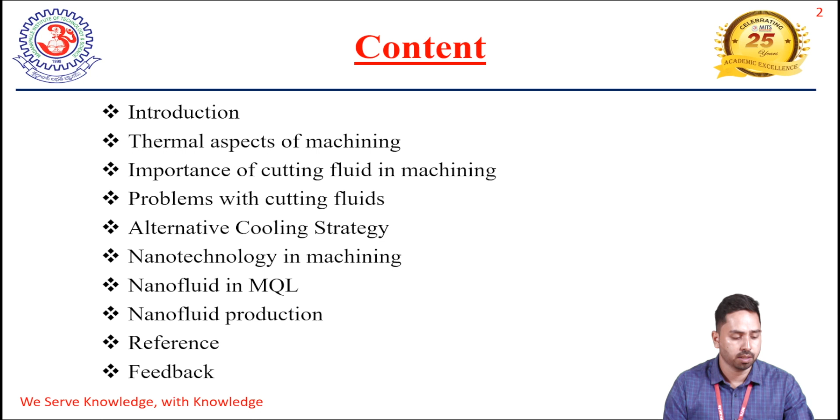In this first lecture, I'll be delivering the following topics: thermal aspect of machining, importance of cutting fluid, problems with various cutting fluids, different alternative cooling strategies, nanotechnology in machining, use of nanofluid in MQL processes, and nanofluid production, which will be confined in the next slide.

Manufacturing is one of the value addition processes by which raw materials of low utility and value, due to inadequate material properties or poor and irregular size, shape, and finish, are converted into high utility and valued products with definite dimension, forms, finish, and imparting some functional utility.

Manufacturing has been a cornerstone of human development and civilization, tracing its roots back to ancient times, when early humans began crafting tools and weapons from stone, wood, and various metals. The history of manufacturing is a story of human ingenuity, resourcefulness, and the continuous quest to improve efficiency and quality of life. Initially, manufacturing was a localized manual process, often carried out by individual artisans and craftsmen.

This period, known as the pre-industrial era, saw the creation of essential goods through labor-intensive methods that were often passed down through generations. As societies grew and humans developed their technologies, trade networks expanded and the demand for goods increased, necessitating the evolution of manufacturing processes.

The Industrial Revolution, beginning in the late 18th century, marked a pivotal shift in manufacturing. The advent of mechanization and the development of machinery powered by steam engines revolutionized production. Factories slowly began to emerge, centralizing production and significantly increasing output. This period also saw the introduction of interchangeable parts, which standardized production and simplified assembly and repair processes.

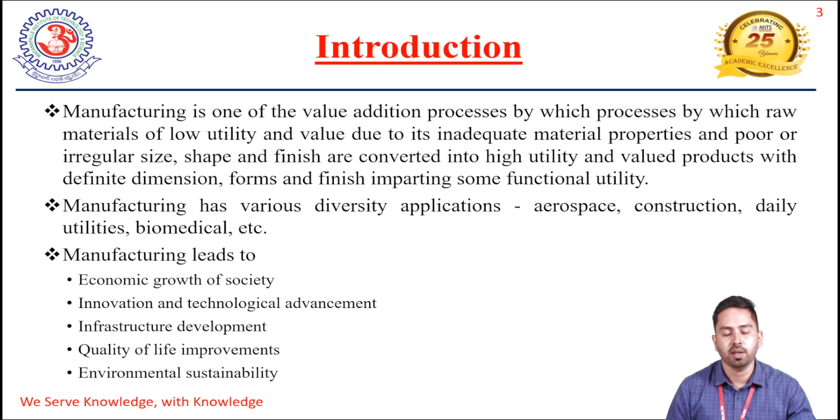Now, coming to the various approaches of manufacturing, generally we have two types of manufacturing approach. One is top down, which is also known as subtractive manufacturing. The next one is known as bottoms up, that is known as additive manufacturing.

In these two methods, subtractive manufacturing has been followed from the starting history of the manufacturing process, but in the 20th century, after the advancement of various technology, additive manufacturing has come as a new and advanced process which will reduce the cost, which will reduce the time, and which will improve the product quality. We'll go one by one.

Contrast to additive manufacturing, where metal is often added layer by layer, subtractive manufacturing includes milling, turning, drilling, or nowadays it utilizes various modern tools like CNC, which is computer numerical control, for precision and efficiency.

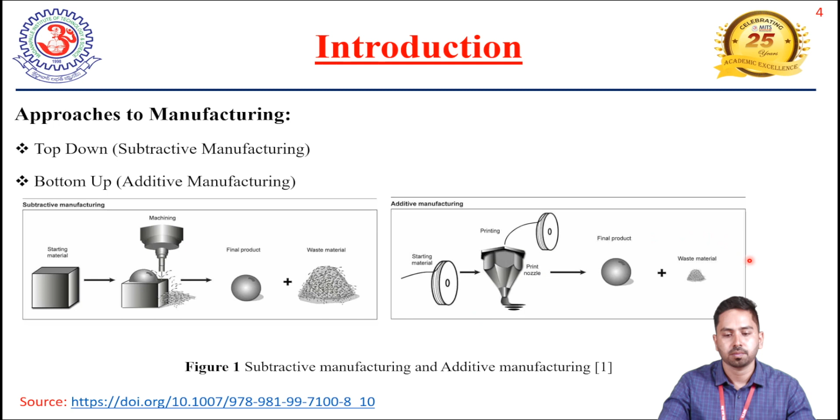Now, coming to the classification of manufacturing process. In this classification, we will focus totally on the subtractive manufacturing part. We will not cover the additive manufacturing part here. So subtractive manufacturing has different subdivisions like machining, forming, joining, casting, powder metallurgy, sheet metal processing, finishing, etc. So we'll cover them one by one.

First, machining. Machining is a manufacturing process that involves removing material from a workpiece to shape it into a desired form. This is typically done using tools like lathe, milling machine, drills, etc. Machining processes are essential for creating precise components with fine detail and tolerance.

Second is forming. Forming processes are used to manipulate the shape of material without adding or removing the material. This category often includes techniques like forging, rolling, extrusion, and drawing. Forming is often used for metals and involves plastic deformation to achieve the desired property or desired geometry.

So next is the joining process. Joining often involves connecting two or more components to create a single assembly. Common joining techniques include welding, brazing, soldering, and adhesive bonding. These processes are very crucial in assembling parts of various materials and sizes in industries like automotive and aerospace.

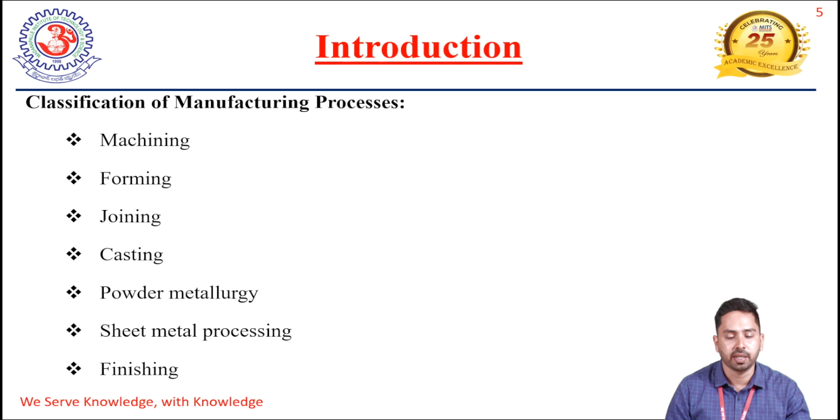Next is sheet metal processing. Sheet metal processing encompasses various techniques to cut, bend, and shape metal sheet into desired form. This method includes shearing, stamping, bending, and deep drawing. This process is prevalent in industries such as automotive, construction, and appliances, where metal sheets are the primary material.

Now, coming to the importance of machining in the manufacturing industry, we'll go to the first topic, machining. As we have already conveyed, machining is a process to remove the excess material in the form of chips or otherwise to give the desired shape, size, surface roughness, and tolerance on the workpiece obtained from a primary manufacturing process.

Through machining, a wide range of material can be manufactured with very close tolerance level. We can have a variety of materials for machining. Variety of shape and special geometry can be included. In summary, in machining, we are using a single point cutting tool or a multi-point cutting tool to remove the material by shear deformation.

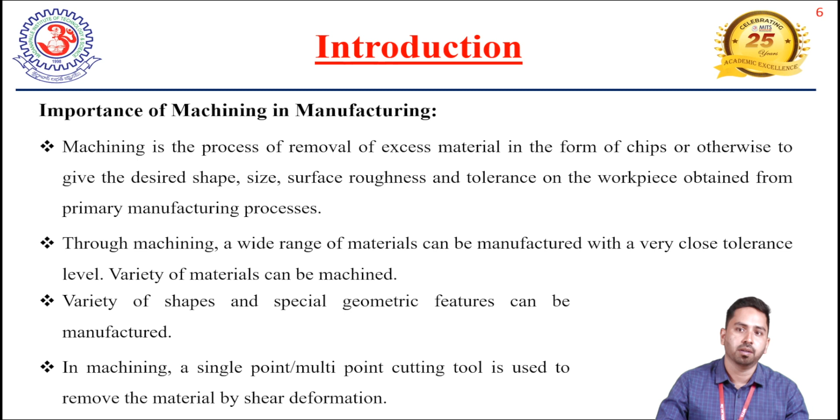Now, one of the major aspects in machining is the thermal aspect. So, in the machining process, the thermal aspect plays a very crucial role in determining the quality and efficiency of the operation.

Now, heat generation occurs primarily due to the plastic deformation of the workpiece material and the friction between the cutting tool and the workpiece. This heat can adversely affect the tool life, causing thermal distortion in the workpiece and altering the material properties also, which potentially leads to surface defects

and dimensional inaccuracy. But through effective heat management, through proper cutting parameters, use of various cutting fluids or advanced cooling techniques to mitigate this thermal effect, which will ensure the precision, which will enhance the tool life, and it will maintain the structural integrity of the machine component.

Now, in the machining zone, there is very enormous heat generation in the workpiece and tool contact surface. The heat generation in the tool and workpiece contact zone may be classified into two parts. First, heat generation due to the shearing. In the shearing zone, the heat is generated due to the plastic deformation of the workpiece. This happens due to the mechanical energy conversion into thermal energy.

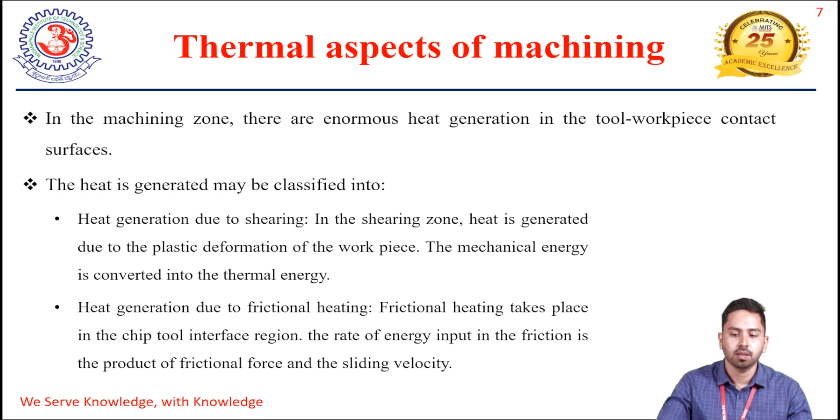So in the machining process, generally the deformation zones are the critical regions where the material undergoes significant plastic deformation. We can broadly categorize them into three main areas: the primary deformation zone, the secondary deformation zone, and the tertiary deformation zone. Now, the primary deformation zone is located ahead of the cutting tool, where the workpiece material first makes contact and undergoes severe compression and shear.

The secondary deformation zone occurs along the tool chip interface, where friction between the chip and the tool face induces additional shearing, and additionally, the temperature rises. The third one, the tertiary deformation zone, is found along the workpiece and tool interface, where the tool flank generates frictional heat and further deforms the workpiece surface.

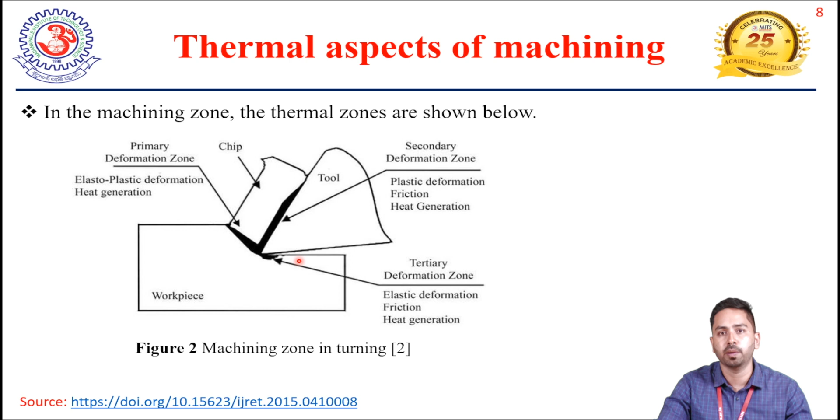Coming to the next thermal aspect of machining, the machining temperature has various adverse effects which majorly affect the workpiece microstructure, then surface roughness, then tool life. Now, the workpiece microstructure is often affected by high temperature in the machining zone, which may introduce several microstructural defects.

Again, temperature or heat generation in the machining zone can significantly impact the surface roughness and the tool life in the machining process. High temperature can lead to thermal expansion of both tool and workpiece, which will result in dimensional inaccuracy and also increase surface roughness.

Moreover, the high temperature accelerates tool wear by high adhesion and high diffusion processes, thereby reducing the hardness of the cutting tool and leading to a shorter tool life. That means our tool life will be very less. Now, we can mitigate this effect through effective cooling and appropriate material selection, ensuring better surface roughness and enhanced tool life.

Now, to mitigate the thermal aspect, there are two major ways through which we can, not remove, but reduce the effect. It is not possible to remove all the thermal aspect 100%, but still we can mitigate or reduce it to a great extent. Now the first way is the application of harder tools like diamond cutting tools, for example, the polycrystalline diamond, PCD cutting tool, etc. The second process is the application of the cutting fluid.

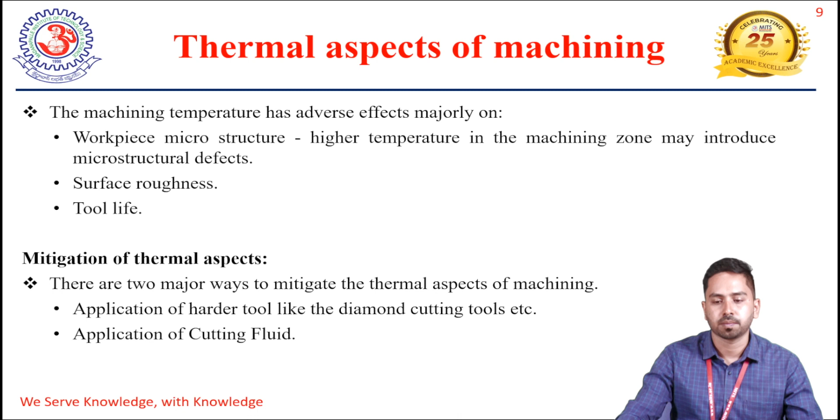So among these two approaches, the application of harder tools will result in increased cost of the tool, which may not be feasible in every industry. So we'll be focusing more on the second approach, application of cutting fluid. So in this course or in this lecture, we'll be focused on the method where application of cutting fluid is done, because it is a comparatively cheap process and it can be followed in every industry.

What is the difference? What is the importance of cutting fluid? Cutting fluid can lubricate. Cutting fluid can be used to lubricate between the contact surface. It can be used to cool down the cutting zone. It is used for chip evacuation, for surface finish improvement. Then it can be used for corrosion protection.

It may be used for tool life enhancement. It may give us tool temperature stabilization. The use of cutting fluid can help us to prevent rust in the workpiece, and it will help us in lower energy consumption. So coming to the importance or effect one by one. First is the lubrication between contact surface.

Now, whenever we are using cutting fluid in the machining process, it can be used as a coolant, which will act as a lubricant between the tool and the workpiece, therefore reducing the friction and the wear. The lubrication minimizes the amount of heat generated from the friction, enhancing the efficiency of the cutting process and preventing damage to both the tool and workpiece.

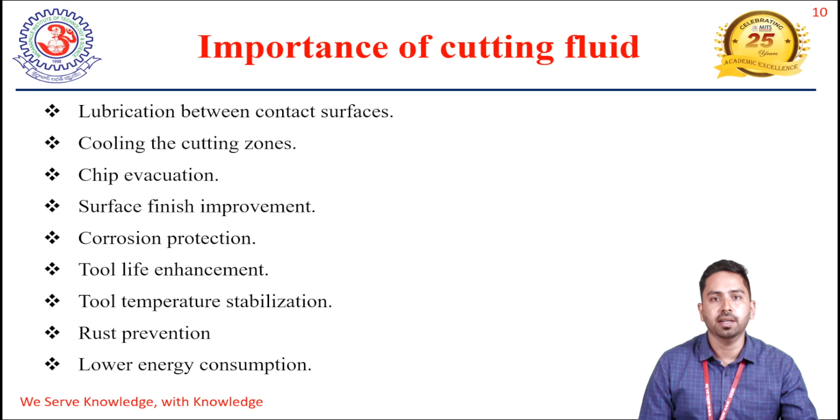Coming to the various problems of cutting fluid, although we have discussed the advantages of using cutting fluid like lowering operation cost and less heat generation, there are often various problems with cutting fluid. First one is the environmental impact, health hazard, then environmental sustainability, the issue of maintenance and disposal cost, then fire and safety risk, then machining limitation.

We can easily see that environmental impact is a very significant concern in today's scenario, because many coolants contain chemicals which can harm the ecosystem if not properly handled. The runoff, that means the waste from the machining operation, can introduce pollutants into water sources, affecting aquatic life and potentially contaminating drinking water supplies. Because nowadays, although most industries follow the guidelines, there may be some industries which may not implement a 100% sustainable process. So there is a real environmental risk in the system.

Next is the health hazard, which arises from exposure to the coolant chemicals, which can include carcinogens, that means chemicals which can cause cancer, or irritants. The machine operator or other workers may experience respiratory issues, skin irritation, or long-term health problems due to prolonged exposure to the coolant mist and residue.

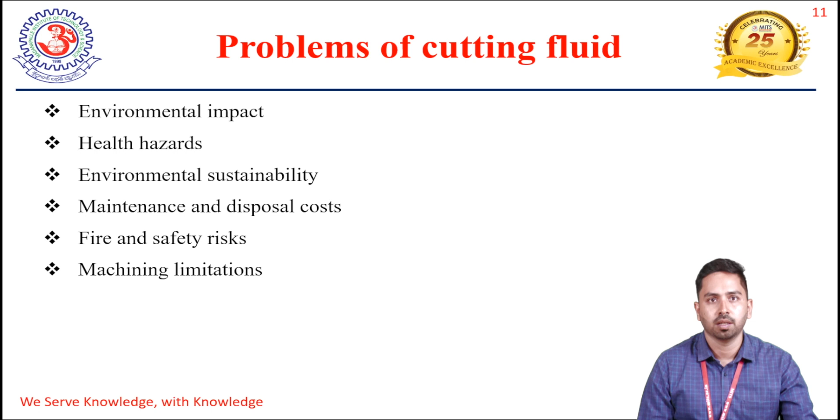Now, going further into the problems of cutting fluid, we have the issue of chemical toxicity. The primary function of the cutting fluid is to lubricate the tool and workpiece interface, thereby reducing the friction between the contact surfaces. Now, whenever we apply cutting fluid at very hot temperatures, what will happen? The coolant will evaporate into mist, or it will generate smoke.

Smoke or emissions during machining create a health hazard to the operator, because in some environments it may not be possible to wear a mask all the time. Although it can be mitigated by using masks, different curtains, or emission fans, it is not possible to remove it 100%.

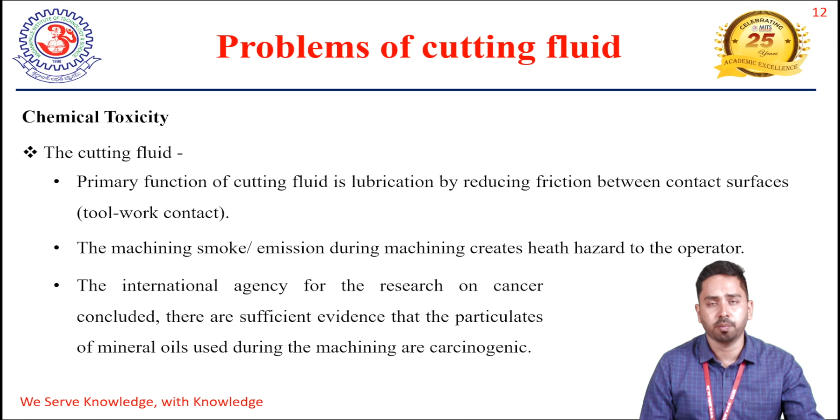The International Agency for Research on Cancer concluded that there is sufficient evidence that the particulates of mineral oil used during machining are carcinogenic, that they can cause cancer in the operator. The table gives various chemicals in the cutting fluid and the diseases. Chlorinated paraffin can induce folliculitis or dermatitis. Polycyclics and nitrosamines can cause cancer.

Nitrites in the cutting fluid can cause skin cancer. Endotoxin can cause respiratory irritation and asthma. Sulfur, lead, boron, zinc, etc. can cause pneumonitis or hypersensitivity. And if the cutting fluid contains cobalt, it can cause bronchitis in the operator.

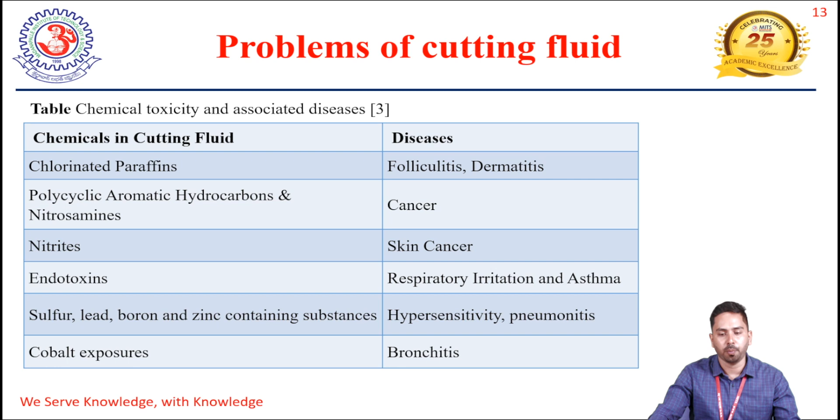Also, metal particles enter the cutting fluid during machining, and if the fluid stays on the machine for a long period of time, it may cause bacterial and fungal populations in the fluid. So it is very essential to mitigate or reduce these problems.

We also have physical hazards, like disposing of the cutting fluid. After use, we need to dispose of the used cutting fluid. This disposal poses a substantial risk of water and soil pollution. The chemicals in the fluid can leach into water sources, which will contaminate the aquatic ecosystem, or seep into the soil, which will affect its fertility and composition.

This pollution can have far-reaching consequences for both terrestrial and aquatic life, which will disturb the ecological balance and endanger biodiversity.

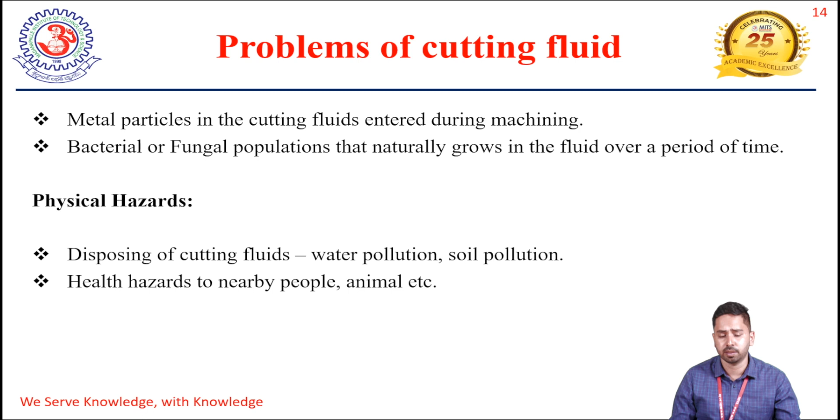So we should have alternative cooling strategies, which will help mitigate the various problems associated with cutting fluid. We can use various eco-friendly cutting fluids like sunflower oil, coconut oil, and canola oil. We can also use cryogenic machining, which is done at extremely low temperatures, below negative 150 degrees Celsius, or 123 Kelvin. The process generally uses liquid nitrogen.

The next process is MQL, minimum quantity lubrication. To minimize the health and environmental hazards, we still use cutting fluid, but in a very minimum quantity. It is also sometimes known as MQCF, minimum quantity cutting fluid.

MQL refers to the use of a precision dispenser to supply a very small amount of cutting fluid to the tool-workpiece interface, typically at a flow rate of 50 to 500 milliliters per hour. In traditional flood cooling, by comparison, we use almost 500 to 600 per minute. So we use a lot less cutting fluid in the MQL process.

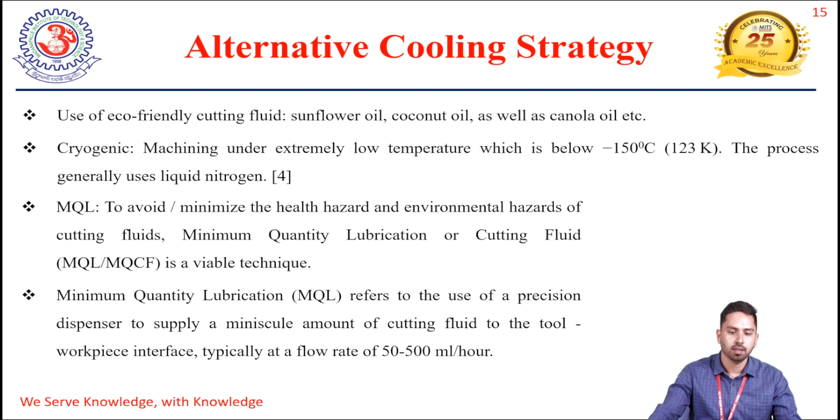So in one of the studies, it was found that the cutting fluid costs almost 17% of the total machining cost. Thereby, by reducing the cutting fluid, MQL can enormously reduce the machining cost while saving the environment and the people. That means we can find a balance in the use of cutting fluid and the machining cost, while protecting the environment and the people.

MQL, the minimum quantity lubrication, is also known as near dry machining, because in dry machining we are not using any kind of cutting fluid. In flood cooling, we're using almost 500 to 600 milliliters per minute. But to balance between dry cooling and flood cooling, MQL requires cutting fluid at almost 1 or 2 milliliters per minute. So it is also known as green machining because of the sustainable nature of the cooling process.

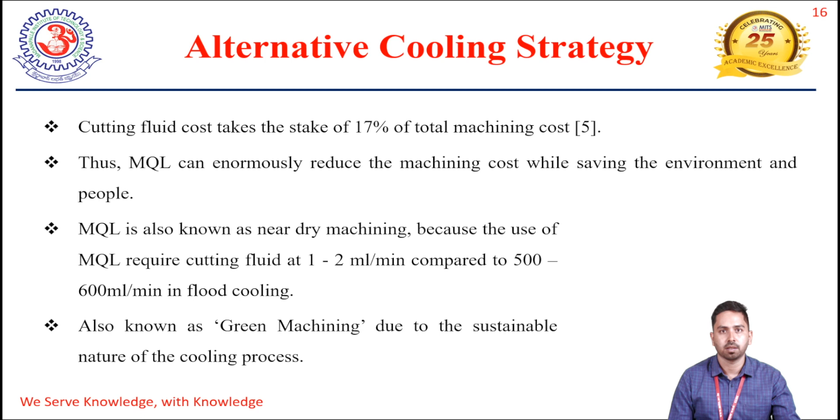Now coming to another alternative in machining, with the help of new advanced technology like nanotechnology, we can incorporate it in the machining process. Nanotechnology is the branch which comprises the synthesis, engineering, and utilization of materials whose size ranges from 1 to 100 nanometers, commonly known as nanomaterials.

Now, based on the composition, nanoparticles are generally placed into three classes: organic, carbon-based, and inorganic. The organic nanoparticles are made from protein, carbohydrate, lipid, polymer, or any other organic compound. The carbon-based nanoparticles are made 100% from carbon atoms. Famous examples in this class are fullerenes, carbon black nanoparticles, carbon quantum dots, etc. In carbon-based nanoparticles, we can have different geometries like single wall, multi wall, etc.

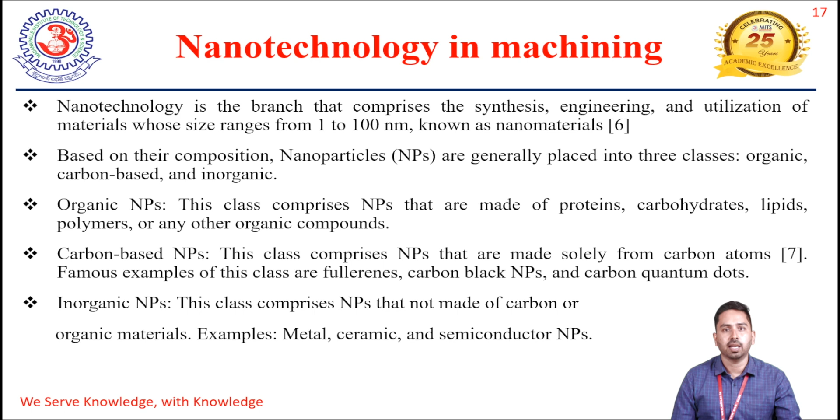Now coming to the third class, the inorganic nanoparticles. This class comprises nanoparticles which are not made of carbon or organic materials, like metal, ceramic, or semiconductor nanoparticles.

Next issue is the thermal conductivity of the nanoparticle. Energy conduction from phonons, known as lattice vibration, or electrons, as well as the accompanying scattering effect, are the main sources of heat transfer in the nanoparticle. In nanoparticles, the thermal conductivity, thermoelectric power, heat capacity, and thermal stability are the main elements of the material's thermal characteristics. The electrical and thermal conductivity of nanoparticles are directly impacted by their size. The ratio of particle surface area to volume increases hyperbolically as the nanoparticle size lowers.

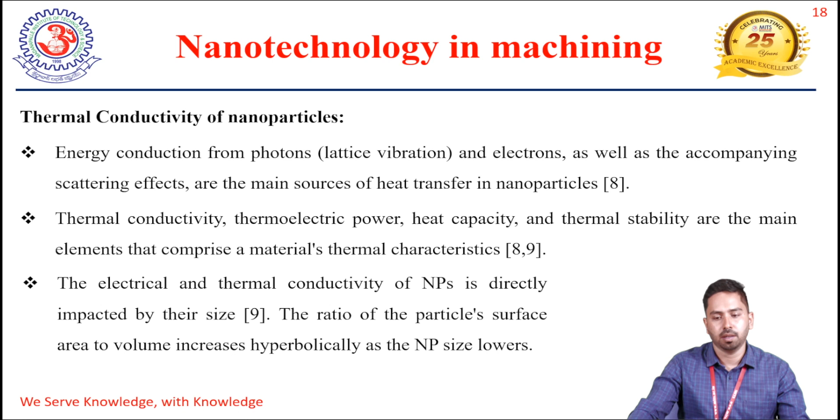The term nanofluid was coined by Choi in 1995 in his paper presented at the American Society of Mechanical Engineers winter annual meeting. The term nanofluid refers to a base fluid which contains a dispersion of solid particles, that is nanoparticles, with a typical length of 1 to 50 nanometers. This nanofluid has highly enhanced thermophysical properties, including thermal diffusivity, viscosity, heat transfer coefficient and thermal conductivity.

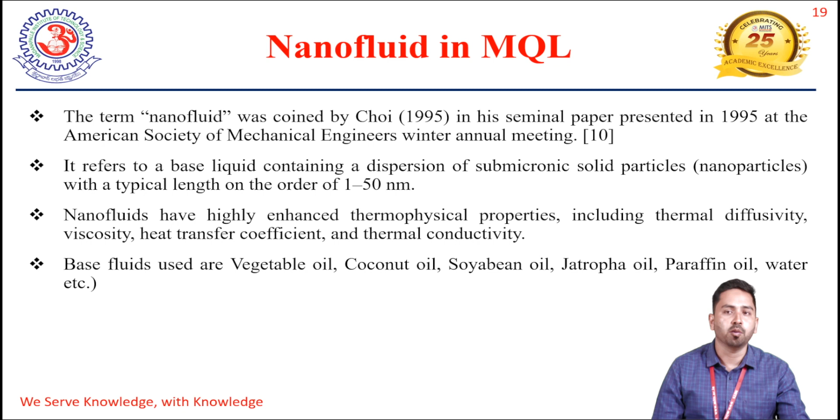For the base fluid, we can use eco-friendly vegetable oils like coconut oil, soybean oil, jatropha oil, paraffin oil, and we can use water also. Apart from the base fluid, the nanoparticles traditionally used by various researchers to produce nanofluids are metal oxides like aluminum oxide, copper oxide, then nitride ceramics, carbide ceramics like SiC, TiC, tungsten carbide, etc., or metals like silver, copper, iron, etc., or semiconductors like titanium dioxide, or various carbon nanotubes like single walled, double walled, and multi walled carbon nanotubes, and composite materials like a nanoparticle core polymer shell composite.

Now, implementing this nanofluid in MQL is sometimes known as NMQL, nanofluid enhanced minimum quantity lubrication. NMQL is an efficient, clean and precise lubrication method, aimed at overcoming the bottleneck of heat transfer technology in MQL application. Nanofluid MQL machining has great potential in new sustainable industrial cutting technology.

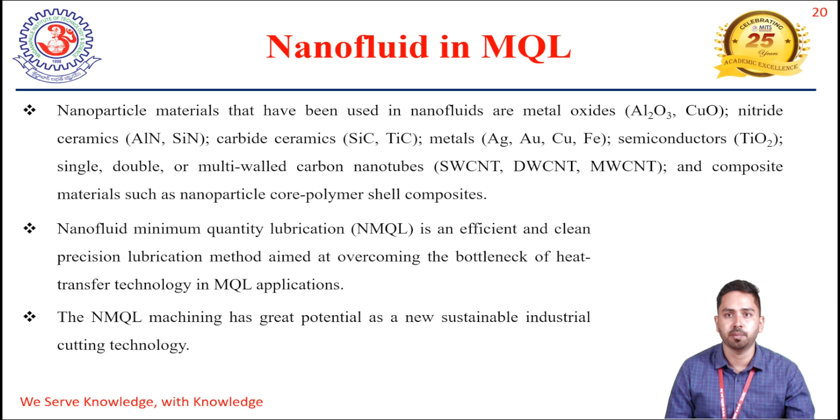Now, one of the major issues is how to produce the nanofluid. Nanofluids are prepared by dispersing nanoparticles into a base fluid. As we have covered, the base fluid can be any vegetable oil, and nanoparticles may be metal oxide, organic, various carbon, etc. To prepare the nanofluid, good dispersion is a prerequisite for its application. Therefore, various surfactants are used to enhance the stability of the nanofluid. Besides, surface modification of the dispersed particles and application of strong force on the clusters of dispersed nanomaterial may increase the stability of the nanofluid. Fundamentally, there are two methods to prepare the nanofluid: the one-step method and the two-step method.

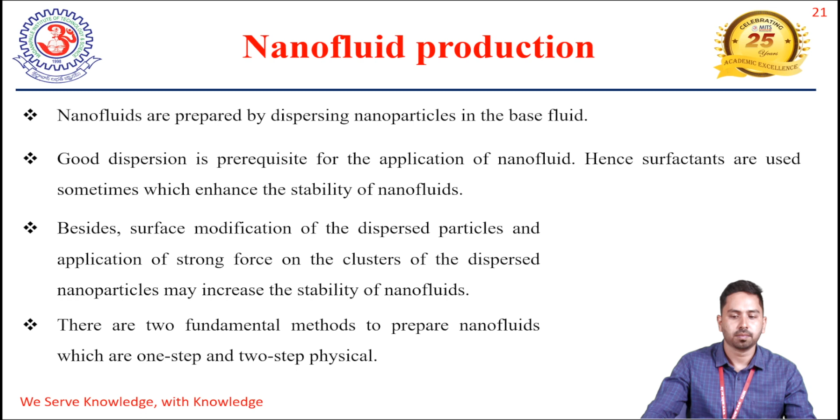Coming to the one-step method, as the name suggests, it is a single-step method for nanofluid preparation. It is a straightforward approach to creating the nanofluid, which is the suspension of nanoparticles in a base fluid. Traditionally, the nanoparticles are directly dispersed into the base fluid in a single step without the need of any additional processing or treatment.

This process typically involves mixing the nanoparticles and the base fluid using techniques like stirring, sonication, or agitation to achieve uniform dispersion. In this method, some processes are avoided, like drying, storage, transportation, and dispersion of the nanoparticle. By the one-step method, we can have a stable nanofluid by using processes like PVD, physical vapor deposition technique, in which direct evaporation and condensation of the nanoparticle are carried into the base fluid.

But the main drawback of this method is the residual surfactant.

One of the key advantages of the one-step method is the simplicity and efficiency, because it eliminates the need for complex procedures or multiple steps. This one-step process is more cost-effective and time-saving compared to other methods of nanofluid preparation. Additionally, it allows for precision control over the nanoparticle concentration and distribution within the nanofluid, which leads to consistent and reproducible results.

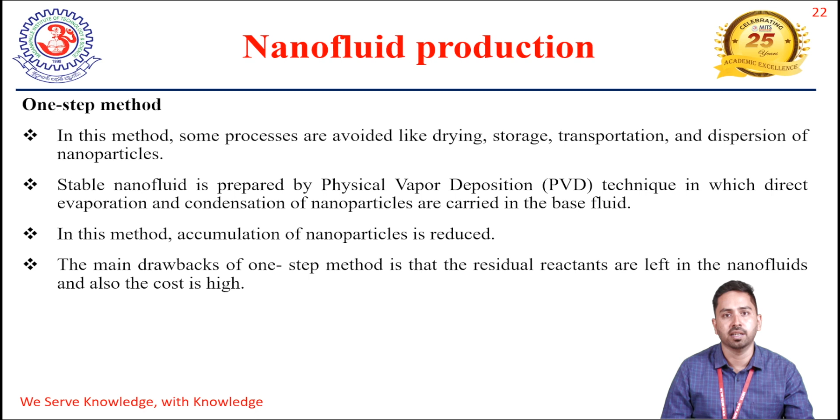Next is the two-step method. Compared to the one-step method, it is the most economic method for large-scale preparation of nanofluid. Typically, in the two-step process, the nanoparticles in powder form are introduced into the base fluid in a predetermined amount. This production process is very inexpensive and massive.

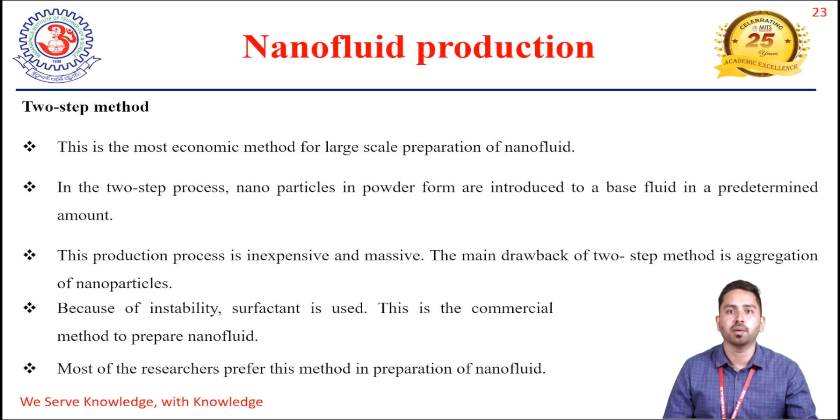But the main drawback is the aggregation of the nanoparticle, meaning agglomeration of the nanoparticle at the bottom of the nanofluid. To overcome this instability or agglomeration issue, various surfactants are used in low quantity. The two-step method is a commercial method to prepare the nanofluid, and various researchers prefer this method for production of the nanofluid.

The resulting nanoparticles typically possess certain properties and may be coated with surfactants or functionalized to enhance the stability and compatibility with the base fluid.

Now these nanoparticles are weighed to a certain amount according to the requirement of the nanofluid. The base fluid quantity required is also calculated. Then both are mixed by direct mixing, and we can use different methods. After direct mixing, a very small quantity of surfactant is used in this process.

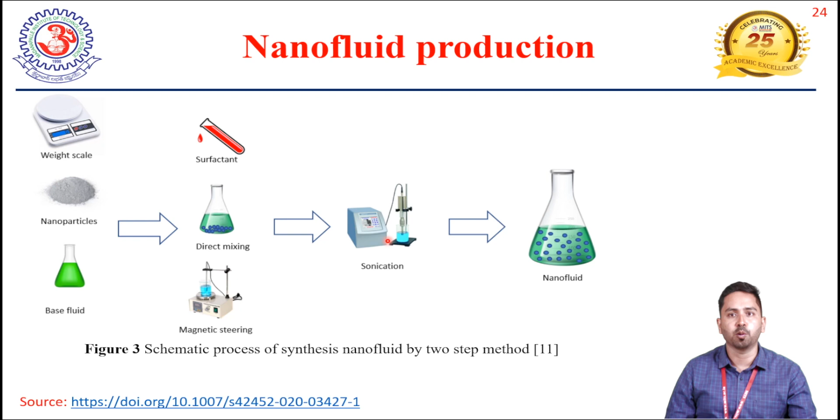Next, the direct mix goes for magnetic stirring and sonication, or various chemical treatments for a long time. The main goal is to achieve uniform dispersion of nanoparticles within the fluid, which is required to have optimal thermal and rheological properties. So careful control of parameters like temperature, pH, and mixing intensity is very essential to produce nanofluid with consistent and desirable characteristics.

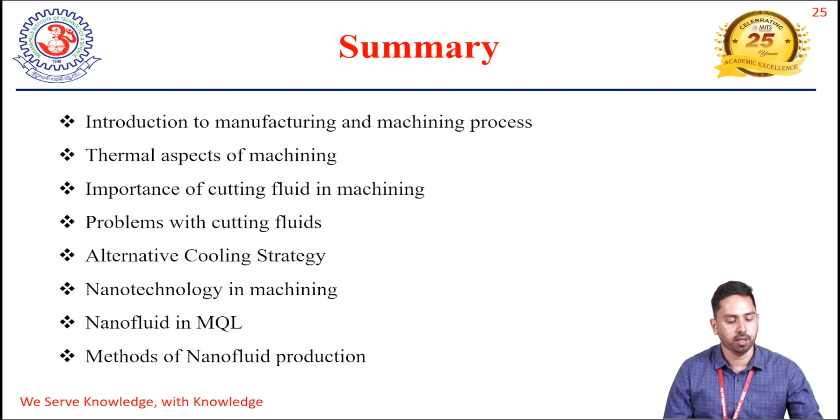In the next PPT, we'll be covering various topics like evaluation of nanofluid stability, how we evaluate the nanofluid thermal conductivity, the impact of various factors on thermal conductivity, the impact of nanofluid on machining process parameters, and we need to analyze the toxicity and problems associated with nanofluid-assisted machining, and the environmental impacts of nanoparticles. This we will cover in the second lecture.